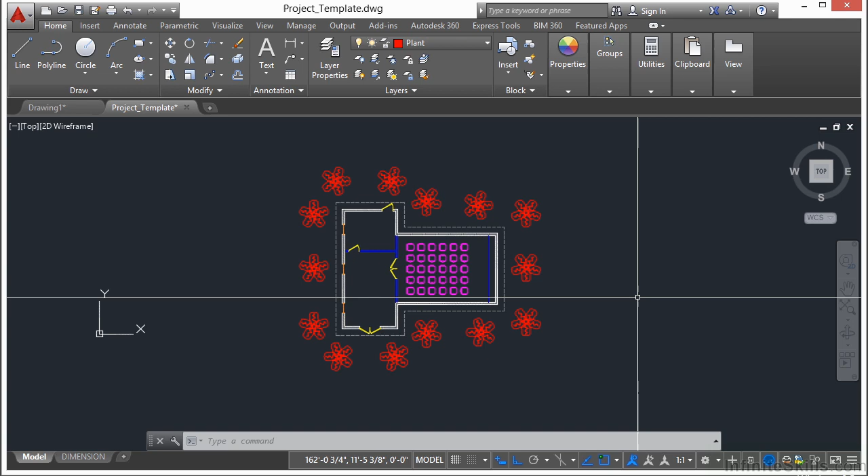Now on to the final part of our entire title project. In this chapter project, you will have created your very first AutoCAD model and drawing sheets. Open up your project file if you don't have it open already, and let's begin.

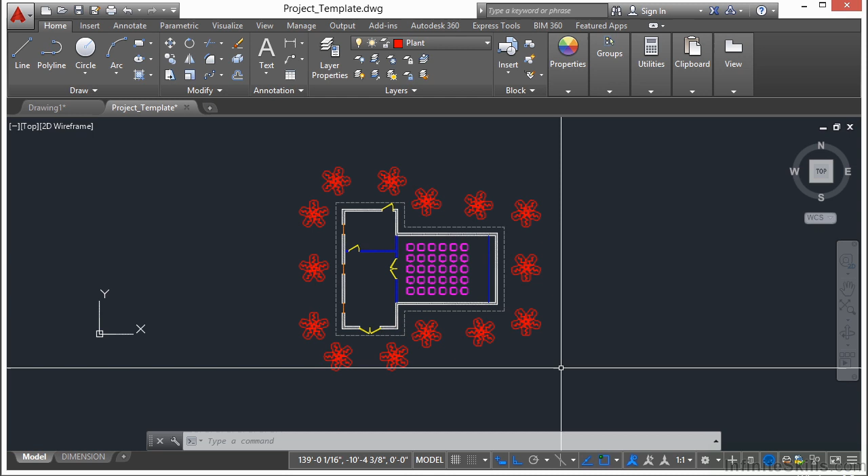We've created our model, all of our line work is done, and now we need to create our paper space tabs so we have actual drawings. We have one set up here already called Dimension, but it doesn't quite show everything the way we want it. Double click inside the viewport and make sure it's unlocked, and let's move this to about the center.

I want the scale to be at 1/4 inch equals a foot. If it isn't, click on the little arrow here, find 1/4 equals a foot, and select it. Then center this item right here, and once that's set up, make sure to lock your viewport so we won't accidentally zoom in and out.

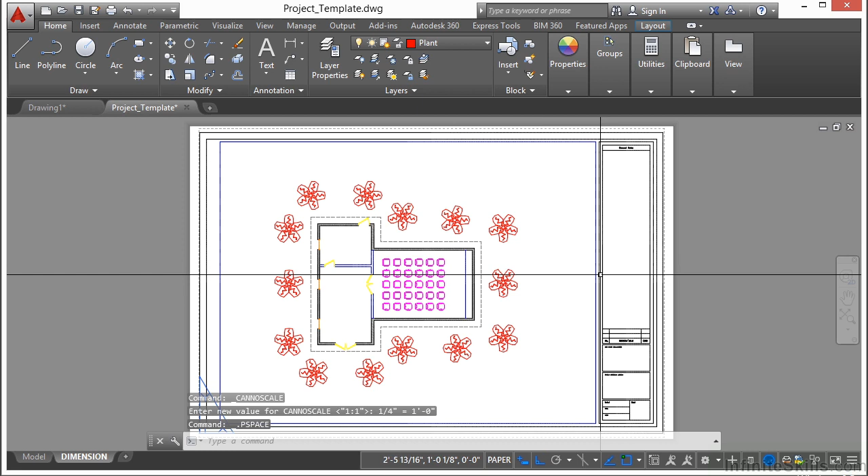Let's come out of this, double click somewhere outside the viewport so it's no longer activated. We're going to add a little information to our title block. Our title block isn't set up as annotative text, which is fine—we're just going to type it in. Go to the text layer, and I want to keep this pretty simple. Go to our Annotate tab and let's change our styles.

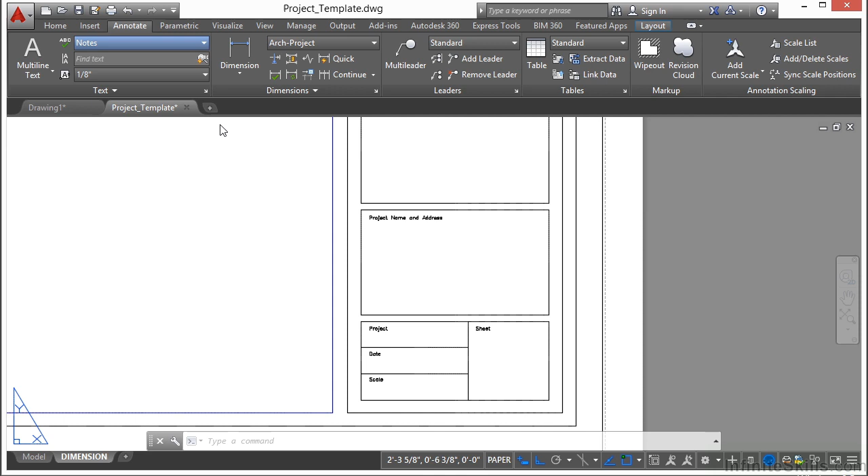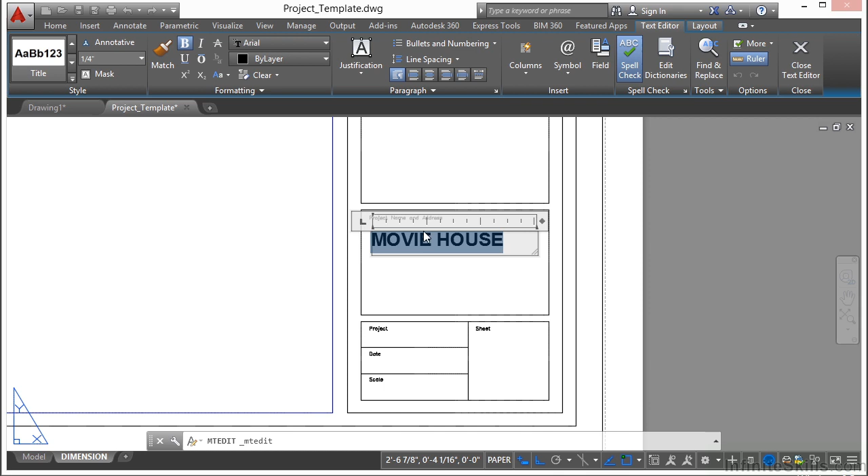Let's go to Title, start the mtext command, pick this point, stretch it across, and enter in Movie House. Now let's select this and edit the text again, make sure we are center justified. I'm going to select everything and go to center justification. There we go, so now our Movie House is centered.

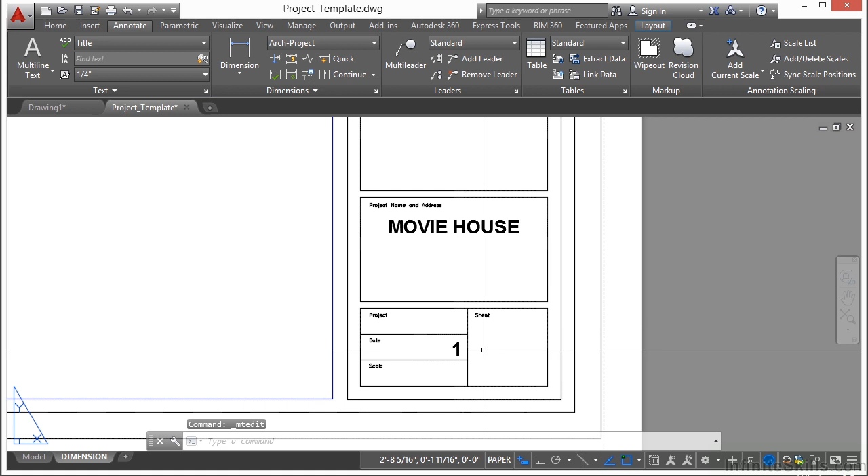Let's copy this text. I'm going to turn off my ortho, put this right here, press enter, double click to edit it, Control A to select everything, and type in the number 1. I'm going to shrink down this box so it's a little different and not as big and bulky, and put this as sheet number 1, somewhere in the center.

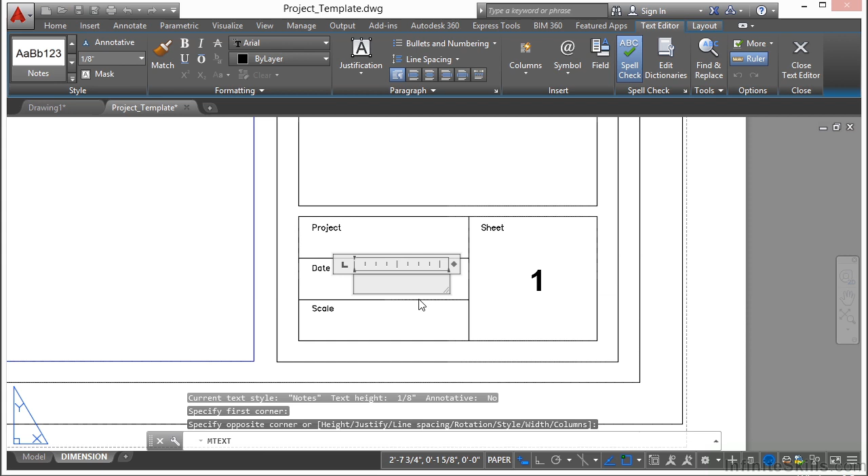Now we need to enter the date and the scale. Instead of the title style, let's go down to our notes so our text isn't as large. Let's use text and type in today's date, whatever it may be for you. Now I want to enter in the scale, using the same type of text.

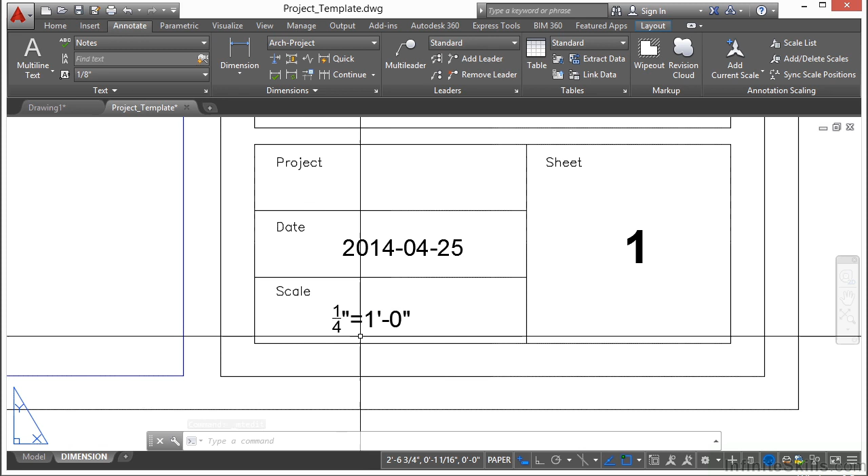This is 1/4 of an inch equals 1 foot. Now you can see the text automatically did a stacking for the fraction, and that's fine for me. If you don't like that, you can change it, whatever it needs to do for you. All right, that's the basic start of this.

Looks like I accidentally copied something over here, which happens from time to time—I'm going to erase it. Now we are ready to start dimensioning this page.

Before we do though, I want to create a second layout page. We're going to go down here to Dimension, right click, say Move or Copy, select Create a Copy, click OK. So now we have 2 pages: Dimension and Dimension 2. Let's rename this—right click on the Paper Space tab and call it Overall.

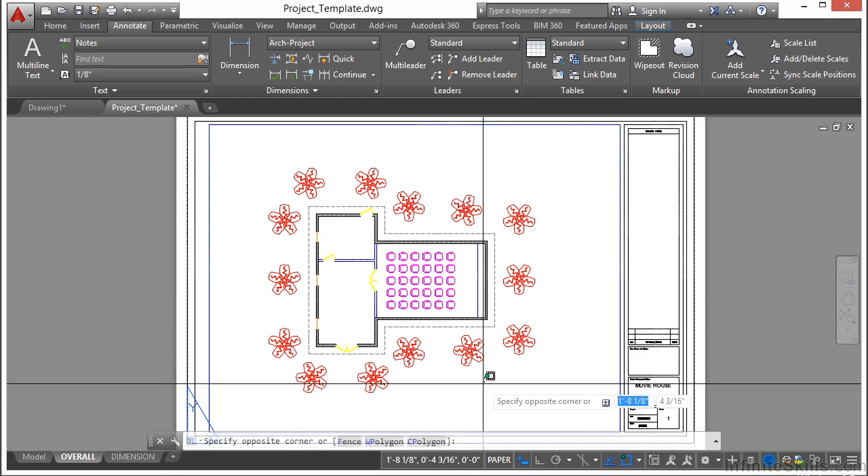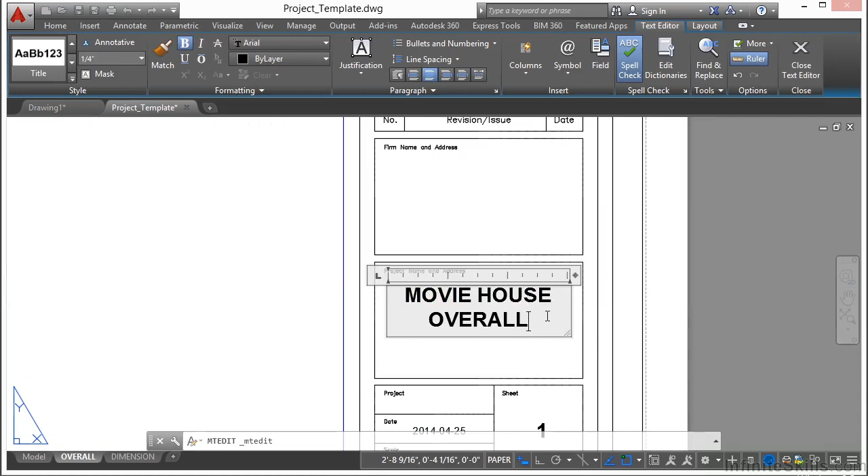So now we have 2 potential drawings that we're going to use. Move over here, double click on the text, go to the end, type in Overall, and we'll keep this as drawing number 1. The date and scale are exactly the same. So double click inside this viewport—I don't want to show the footing.

Let's go to the Home tab, the Layers panel, click on the snowflake here for Freeze, select that line, press Enter, then double click outside somewhere else. And that's fantastic—so now we have an overall view.

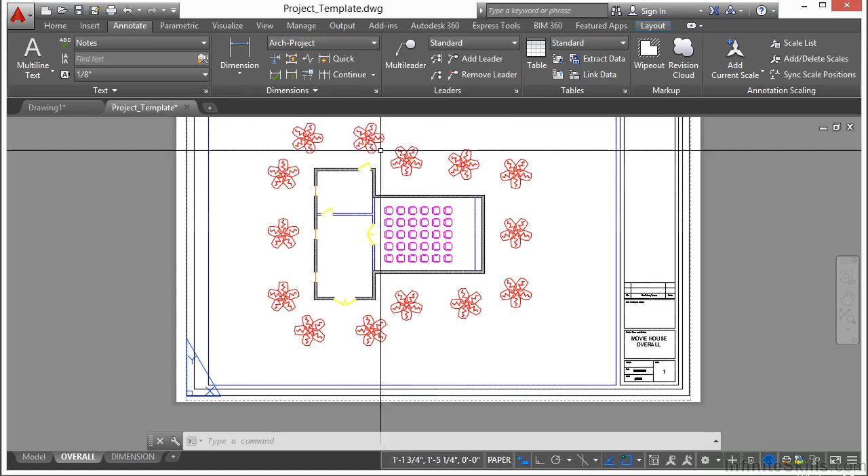We're going to put in a few dimensions. Let's switch to our dimension layer, go to our Annotate tab and click on our dimensions, but I want to make sure our Arch-Project is what we have set up. It's there—click on our dimensions.

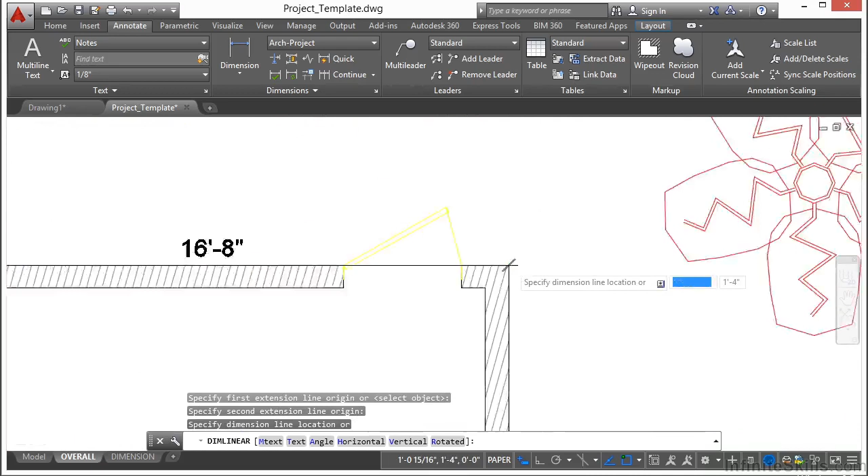We're just going to insert a few dimensions. Click this point, come down to the bottom here, and put it right there. Let's start another dimension—click here and here. We're going to put in our dimension right there. Now click on continue.

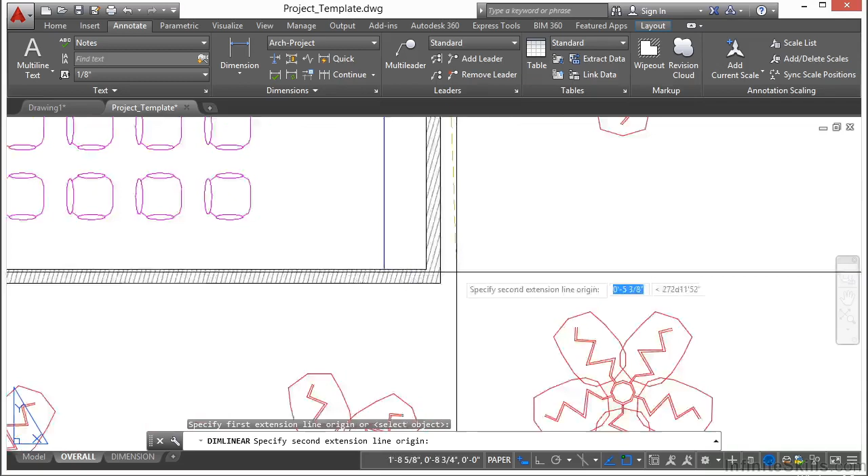And we're going to drop that in right there. That's good—it kind of comes over the top of this, but that's all right. We need one more dimension, coming here and here for this other wall. I've got a little bit of that—make sure you don't snap to it. Zoom out.

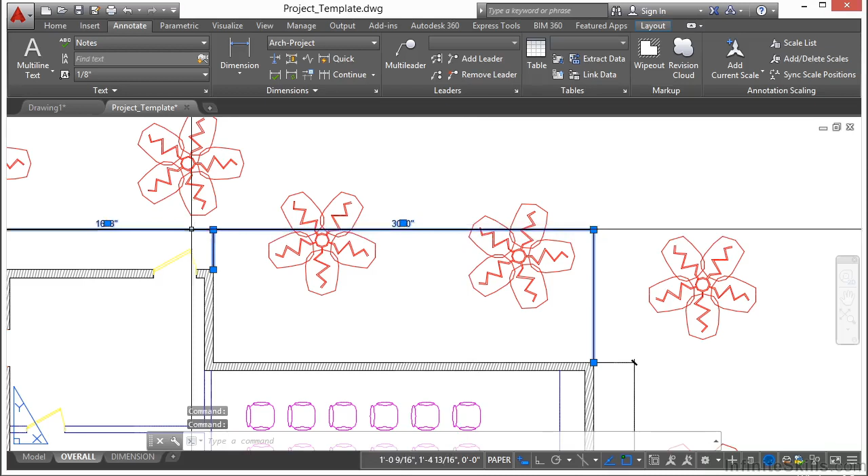So you see how I'm working in here, zooming in and out, panning back and forth constantly while executing other commands. I don't really like this here, so I'm going to select this and this one as well, grab that grip and stretch them both all the way up to the top, at the exact same time. Press escape to let go of it. And there are some overall dimensions for our drawing.